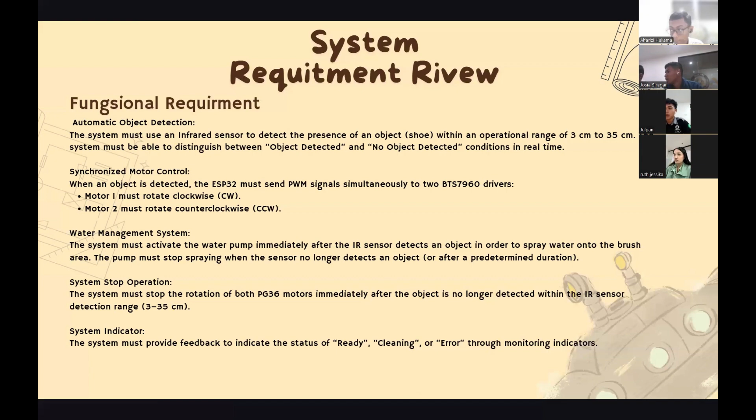Non-functional needs. Performance, response time: the delay between sensor detection and motor activation must not exceed 0.5 seconds. Torque: the PG36 motor must be able to maintain stable rotation even when subject to pressure from the sole.

Reliability. The system must be capable of operating repeatedly without requiring a manual reset of the ESP32 microcontroller. The connection between the IR sensor and ESP32 must remain stable against unwanted light noise interference.

Safety, waterproofing. Electrical components such as the ESP32, BTS7960 driver, and power supply must be completely isolated from water channels and the spraying area to prevent short circuits. Electrical protection. The system must include current protection mechanisms, such as fuses or driver-based current management, to prevent motor damage in case of jamming or overload.

Availability and maintenance. The mechanical design must allow the brush and water tank to be cleaned or replaced easily. Cables must use sturdy connectors to prevent disconnection caused by the strong vibration of the PG36 motor. Power scalability. The system must be capable of handling current surges when the motor and water pump operate simultaneously without causing voltage drops on the ESP32.

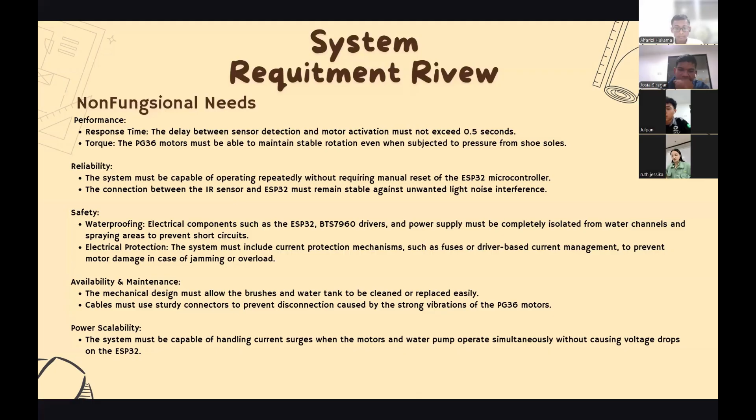Concept design. 1. System block diagram. Power supply, or 12 V power source. The 12 V power supply serves as the main power source for the system components, including the two PG36 motors and water pump. Step-down converter. The step-down converter reduces the voltage from 12 volts to 5 volts or 3.3 volts to safely power the ESP32 and IR sensor, preventing short circuit and overheating.

Input, or IR sensor. The infrared sensor detects the presence of an object within a distance range of 3 to 35 cm. The signal is then sent to the ESP32 in the form of a digital logic signal, either high or low. Process, or ESP32. The ESP32 acts as the main controller that processes system logic. Once the sensor is triggered, the ESP32 immediately commands 3 outputs simultaneously: activating the water pump, rotating motor 1 clockwise and rotating motor 2 counterclockwise.

Output, or actuator. BTS7960: this driver receives PWM signals from the ESP32 to control the speed and rotation direction of the PG36 motor. Water pump. The pump is connected through a relay or MOSFET because it cannot be controlled directly by the ESP32 pins due to the limited current capability of the microcontroller.

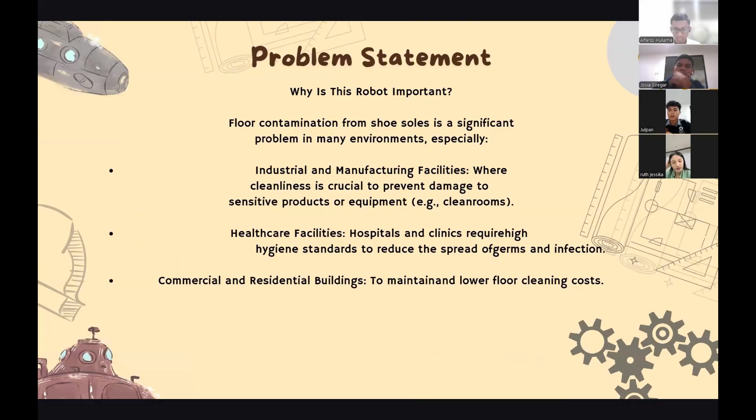2. Brushing mechanism. Dual roller brush. The system uses 2 cylinder brushes mounted in parallel. Motor 1 rotates the brush inward toward the center. Motor 2 rotates the opposite brush inward toward the center from the other side. Purpose: the opposing symmetric rotation prevents the user's foot from being pushed to one side and ensures that dirt is collected at the center point for disposal. Power transmission.

The PG36 motors are connected to the brush using a pulley belt system to reduce vibration and protect the motor shaft from shock loads. Water distribution system. Nozzle spray: water pipes are positioned beneath the brush with nozzles directly at the contact point between the brush and the shoe soles. Water pump placement: the pump is placed near a clean water tank to make refilling easier.

Component placement. Electronics box: all electronic components, ESP32, BTS7960 driver and relay, are placed inside a sealed plastic enclosure positioned at the top or side of the system, away from water splash. Infrared sensor position: the IR sensor is installed at the front of the brush area with a downward-angled housing to prevent water accumulating on the sensor lens, which could interfere with detection accuracy.

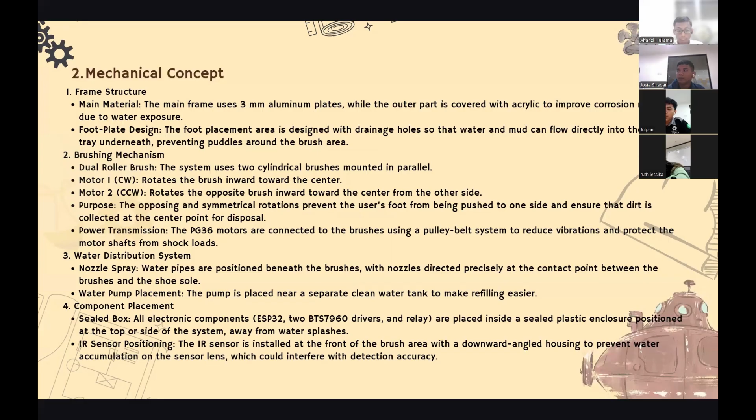Number 3, program algorithm. Phase 1, shoe detection. The robot operates in standby mode. In this phase, the ESP32 continuously monitors the signal from the infrared sensor. When the sensor detects shoes placed on the platform within a distance range of 3 to 35 cm, the sensor sends a trigger signal to the microcontroller to start the operating cycle.

Phase 2, cleaning process. After receiving the trigger signal from phase 1, the microcontroller immediately activates the cleaning system. PG36 motor: the microcontroller sends a signal to the BTS7960 driver to rotate the motors synchronously. Motor 1 rotates clockwise, or CW, and motor 2 rotates counterclockwise, CCW. Water pump: the pump immediately sprays water through the hose to soften the mud. Duration: this process runs automatically for a predetermined duration, for example 10 seconds, to ensure maximum cleaning of the shoe sole.

Phase 3, standby mode. After the cleaning duration is complete, or if the shoe is removed before the process ends, the microcontroller cuts off power to both the motor and the water pump. The motor stops rotating, the water spray turns off, and the system returns to standby mode, waiting for the next operation cycle back to phase 1.

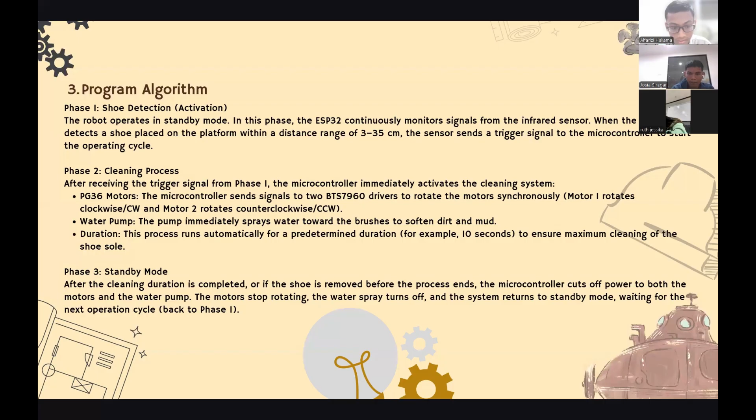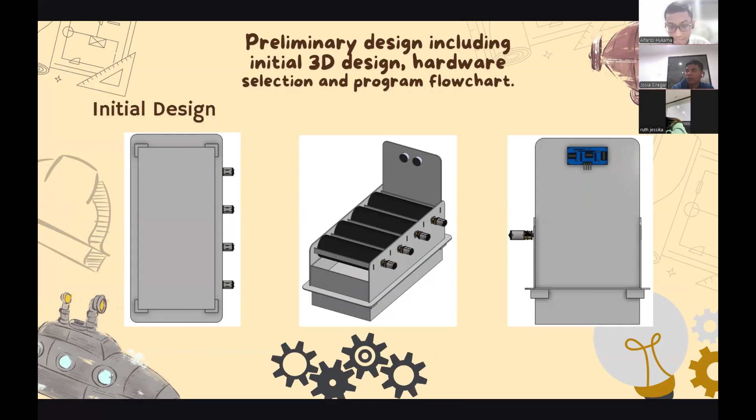Preliminary design, including initial 3D design, hardware selection, and program flow. This is the initial design. Next, hardware selection. Number 1, ESP8266. Function: controller. Description: processes sensor data and controls motor movement. Number 2, ultrasonic sensor. Function: object detector. Description: measures distance to the shoe sole using sound wave reflection. Number 3, motor driver. Function: motor interface. Description: manages high current power delivery and motor direction.

Number 4, DC motor. Function: actuator. Description: drives rotation of the scrubbing brush. Number 5, NCR 18650 battery. Function: motor power supply. Description: provides dedicated high current power for the motor. Number 6, USB cable and laptop. Function: logic power and debug. Description: powers the ESP8266 and enables real-time monitoring. Number 7, jumper wire. Function: interconnect. Description: links data, signal, and power between all components.

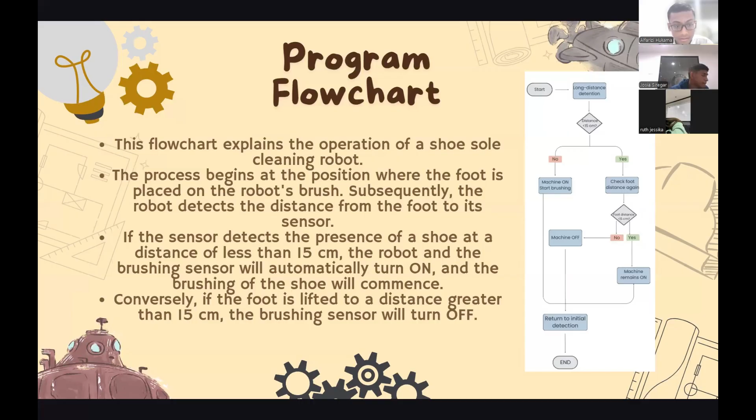Critical design, including final 3D model, confirmed hardware selection, and software algorithm. Number 1, technical specification: component selection is appropriate for the high torque required for shoe cleaning. Number 2, electronic design: the BTS7960 driver successfully delivered high current to the motor safely, supported by the ESP32 in processing sensor data. Number 3, sensor selection: the infrared sensor is capable of precisely reading objects in the 3 to 35 centimeter range and provides a very fast trigger response.

Number 4, algorithm performance: the 3-phase algorithm runs automatically according to the designed logic sequence. 5, energy: the 12-volt power supply is sufficient to run 2 PG36 motors and 1 water pump without excess noise. 6, mechanical design: the frame structure has been updated with neater and safer cable routing, ensuring no cables are snagged while the system is in motion. 7, cleaning function: the cleaning function must run systematically. The combination of water spray and strong force from the PG36 motor successfully cleans mud from the shoe soles efficiently.

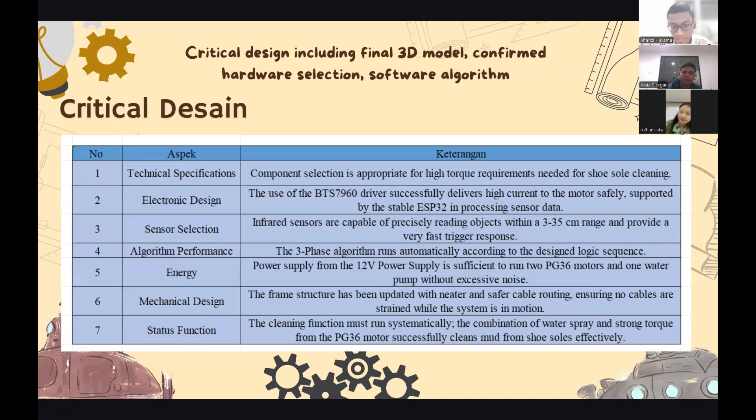Final design. Next, critical design including final 3D model, confirmed hardware selection, and software algorithm. Confirmed hardware selection. Number 1, ESP32 microcontroller, main system control unit. Description: manages all control logic, sensor processing, and PWM signals for the motors and pump. Number 2, BTS7960 motor driver. Function: motor power controller. Description: high current driver used to provide stable current to the PG36 motor and prevent overheating.

Number 3, infrared or IR sensor. Function: object detection. Description: detects the presence of shoes within a 3 to 35 centimeter range to initiate the automatic cleaning process. Number 4, water pump, for mud cleaning: sprays water onto the brush area to facilitate the removal of mud and stubborn dirt. Number 5, timing belt.

Function, mechanical power transmission. Description, connects the motor shaft to the brush shaft. Number 6, power supply. Function, main energy source. Description, acts as the power source for actuators such as the motor and water pump. Number 7, relay module. Function, pump switch control. Description, allows the microcontroller to turn the water pump on and off during the cleaning phase until completion.

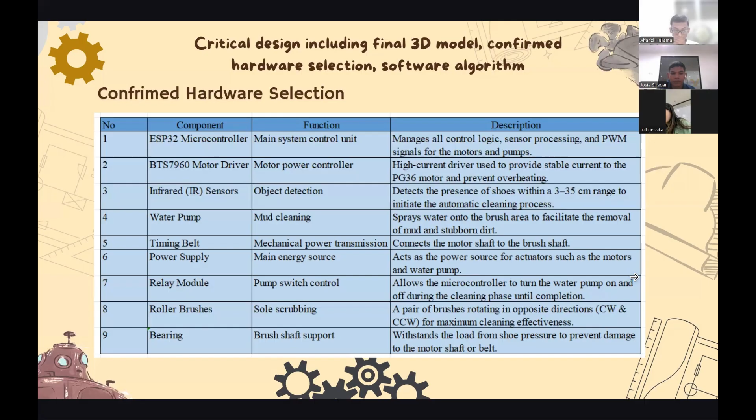Circuit diagram. Software algorithm. Start, system begins operation. Initialize system. Initialize ESP32, IR sensor, BTS7960 motor driver, and water pump relay. Read sensor, IR sensor. The system continuously monitors the infrared sensor for object detection within a 3 to 35 centimeter range.

Check shoe detection using adjustable IR obstacle sensor. No, system stays in standby mode. Yes, start cleaning, system triggers the cleaning cycle. Activate cleaning cycle, phase 2. Water pump instantly sprays water onto the brushes to soften mud and dirt. Dual motor. Motor 1 rotates CW and motor 2 rotates CCW simultaneously via BTS7960 driver.

Power transmission, or belting system. Motors drive the roller brushes through a timing belt and pulley mechanism for smooth torque delivery and shock absorption. Check timer and occupancy. The system monitors the cleaning duration, 10 seconds, and real-time sensor feedback. Time up or shoe removed, stop, proceed to shutdown phase. Else continue, keep brushing and spraying.

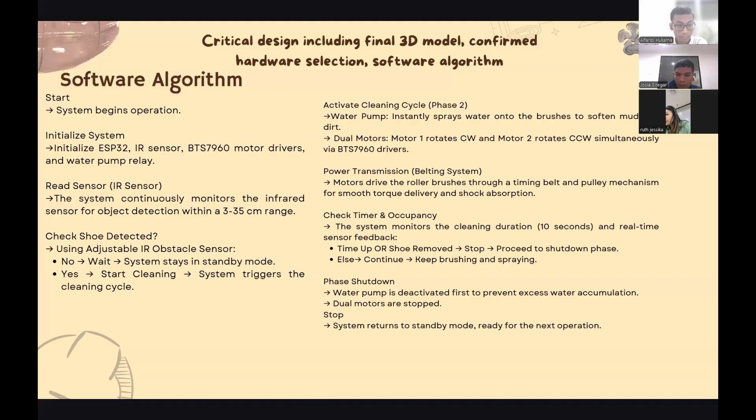Phase shutdown. Water pump is deactivated first to prevent excess water accumulation. Dual motors are stopped. System returns to standby mode, ready for the next operation. Prototyping, results, and testing. Number 1, testing aspect. IR sensor detection. The sensor successfully detects objects accurately within a distance range of 3 to 35 centimeters. Number 2, microcontroller response. The ESP32 receives signals from the IR sensor and executes the cleaning algorithm without any disruptive delay.

Number 3, PG36 motor performance. The two PG36 motors rotate synchronously, CW and CCW, with strong torque capable of handling the pressure load from the shoe soles without stopping. Number 4, BTS7960 motor driver. The driver is able to provide stable current to the motors without experiencing excessive overheating. Number 5, water pump system. The water pump sprays water directly toward the brush immediately after the sensor is triggered, helping to soften dirt effectively.

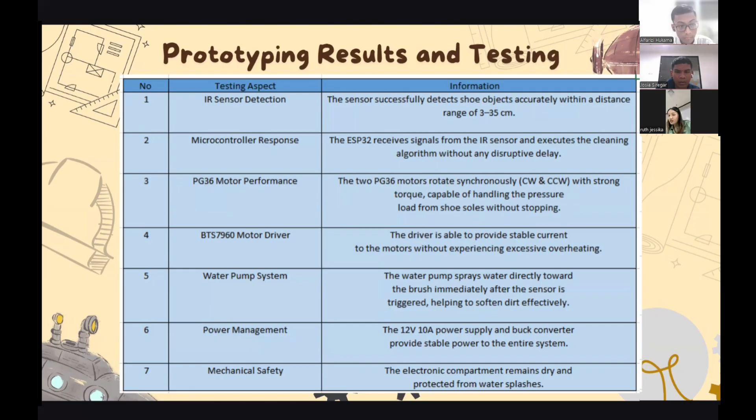Number 6, power management. The 12-volt 10 ampere power supply and buck converter provide stable power to the entire system. Number 7, mechanical safety. The electronic compartment remains dry and protected from water splashes.